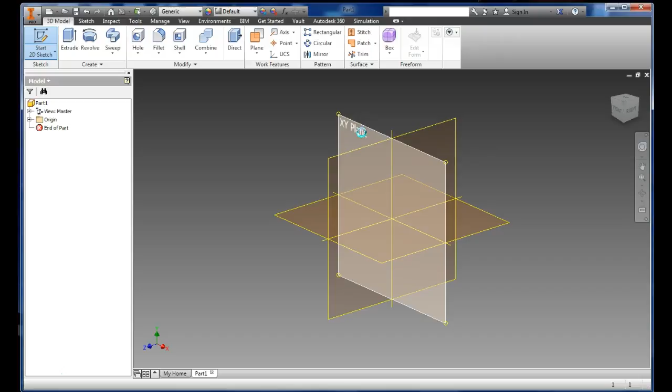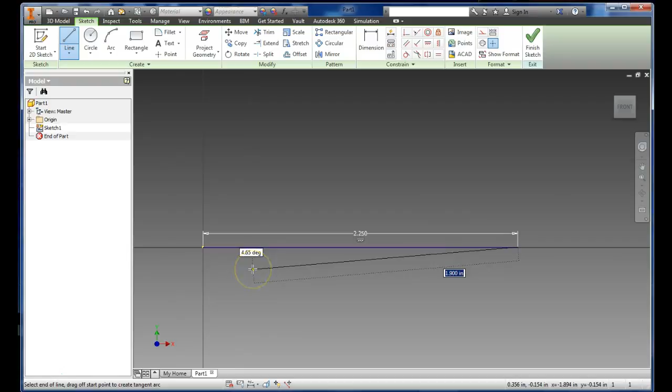I'm going to select this plane, XY, and now I'm starting to sketch it out. Again, I'm only going to draw the top half to make it a little easier. 2.25 is the overall length. Zoom out. Alright, on this right side, the diameter is 0.625, so I'm going to go up half of that - 0.625 divided by 2. That automatically did the math for me.

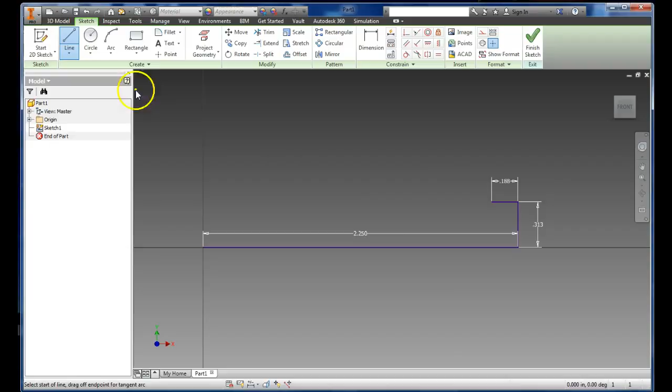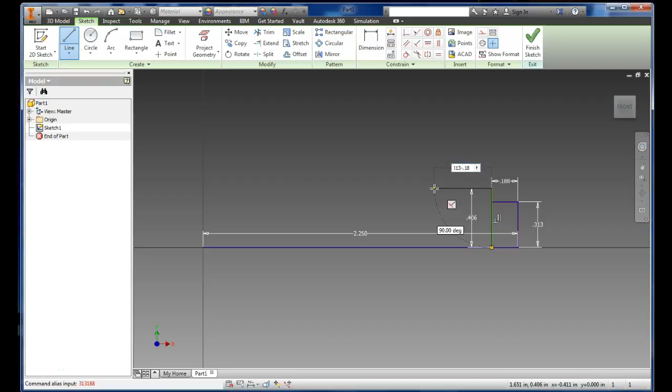This section comes over 0.188. Now I'm going to come up. This next diameter is 0.812, so 0.812 divided by 2. And this one comes over - total distance is 0.313, but I've already gone 0.188. So let me see - 0.313 minus 0.188. There we go.

Then line it up. Next diameter is 1.625, which is the biggest one - 1.625 divided by 2. Alright, this one, all the way from the back is 0.75, so I have to subtract 0.75 minus 0.313. Down. Next diameter is 0.75, so 3/8 up. This distance is 1.688 minus 0.75. Connect down. And then the very last part, diameter is 0.312, so 0.312 divided by 2, and over.

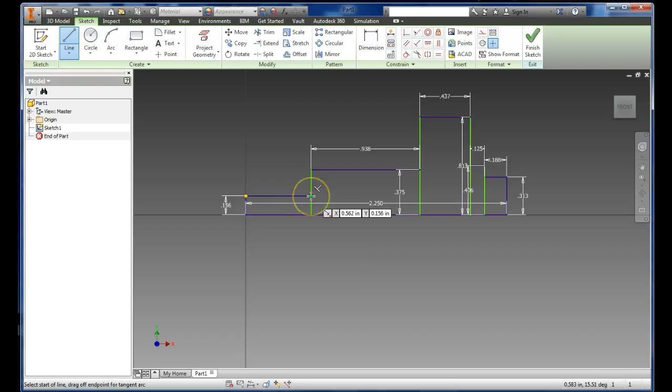Trim. Oh, out of the trim command. Alright, now see how these are jumping up?

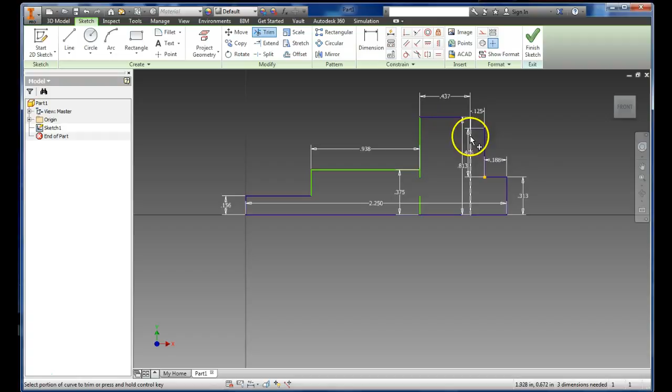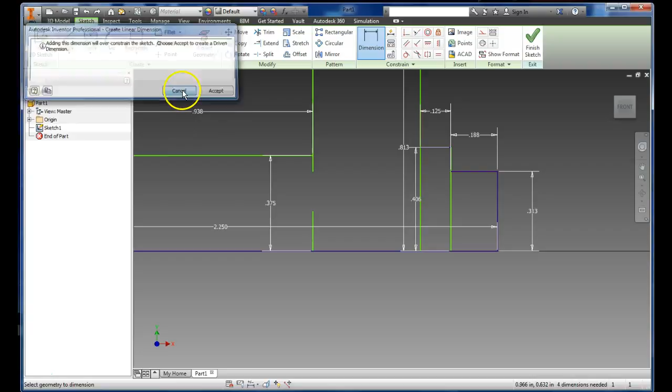You have to add in a dimension to kind of lock it in place. So if I go endpoint to this line, bring it over. Alright, so it's saying over-constrained, delete, point, line, place. There we go.

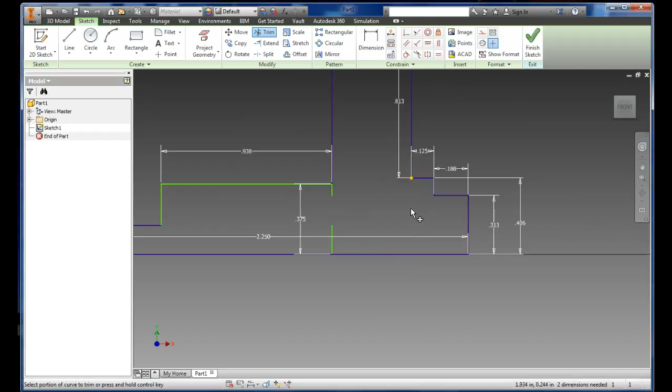Now if I trim it, it should stay locked in place. So if you click trim, it's going to try and keep this dimension the same, and it's going to move the whole thing up. Let's see if it does the same for this one. Trim. Yep, see, kept it the same, moved it up. Let me go back.

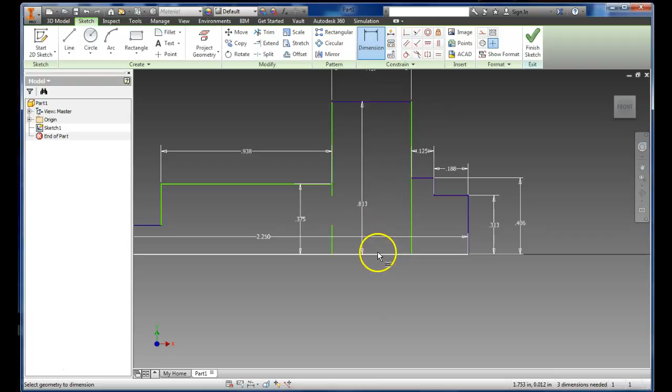Let me do a dimension here to here. Over constrained, so I got rid of this one. There we go. Now, because it's not measuring the distance of this line, but the distance from this one to the center line, when I trim it, it'll stay. These little bits I can just delete.

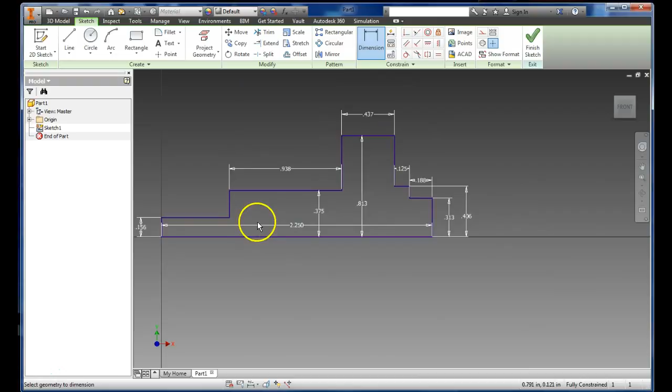Now that we're getting into stuff that's a little more complicated, putting in dimensions and having them go into the right spot gets a lot more important. But I have the silhouette of one side - I finished my sketch.

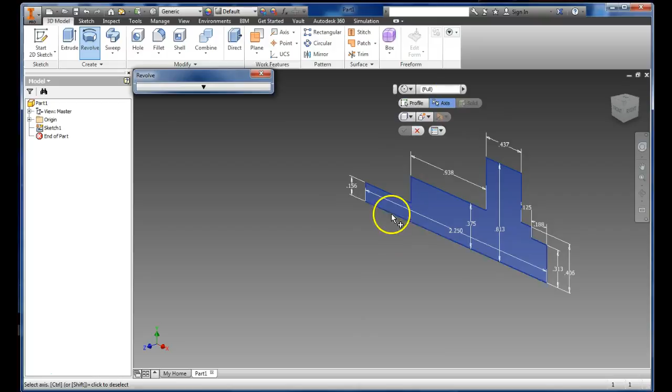Revolve. There's only one profile, so it automatically selects it. Now once I set the axis, I get my center point here, and I rotate it around.

Last thing is there's a hole in here. It gives me all the details, so I'm going to use the hole command. Alright, it is a chamfered hole, so I'm going to select here. The angle tells me it's a 45 - I think I'm going to have to double that to 90, but let me double check.

This distance it tells me is 0.062, which seems a little goofy. Oh, because that's giving me an actual chamfer. Alright, so we'll just do a regular hole and we'll chamfer it separately.

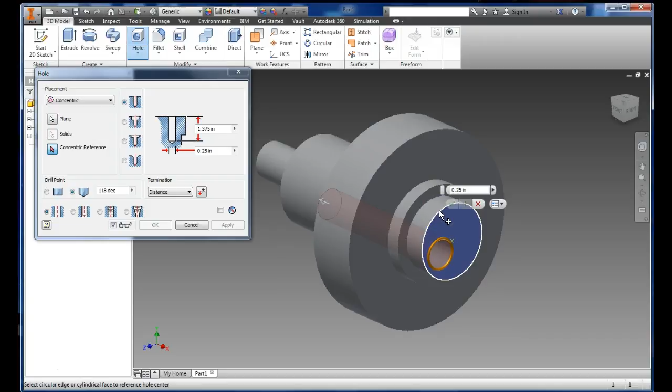The depth, it tells me, goes down 1.375. Diameter is 0.25, so that's good. Looks good, got that, got that. Change from linear to concentric. Select my plane, select a concentric reference, one of the other two circles. Select it, click OK - so I have my hole through the middle there.

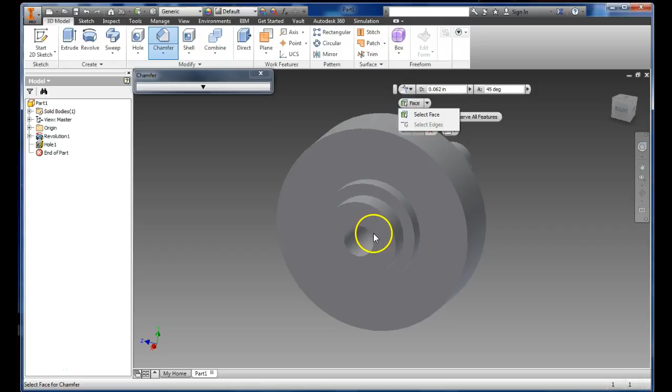And all I would do is fillet, chamfer, distance, like 0.062 - get rid of that extra period in there. Distance and angle, and it's on a 45. Go here, select my edge, click OK, and it makes it. So they list it a little bit differently - if I was a machinist or someone doing this, I would just do a countersunk hole, but they did a chamfer onto the end of the hole.

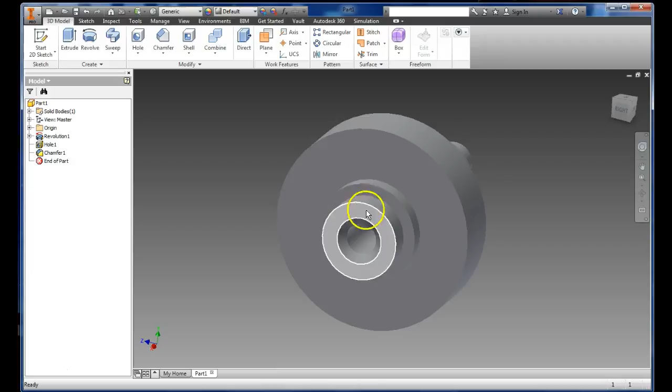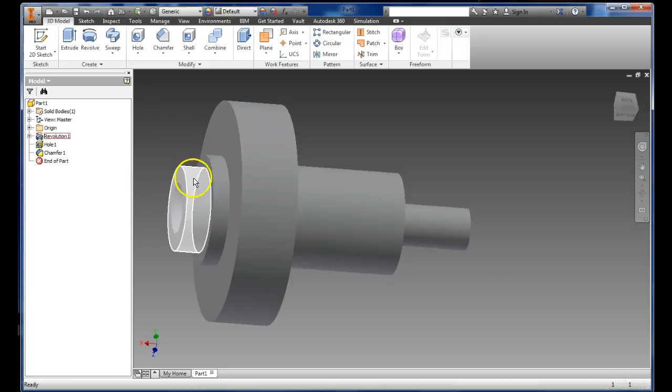Alright, the other way of doing this, if you didn't do a revolve, is basically start with this circle, extrude at this distance, draw this circle, extrude at this distance, and basically you're building steps on. So instead of one revolve command, you would have 1, 2, 3, 4, 5 extrusions. Again, this one not a huge deal, but on other ones, if we can simplify this model tree, that's going to be better and easier. Once you get an error, it will make it easier to find where the error or where something got messed up actually is.

So I have this one - let me go save as. It is valve pin. Save.

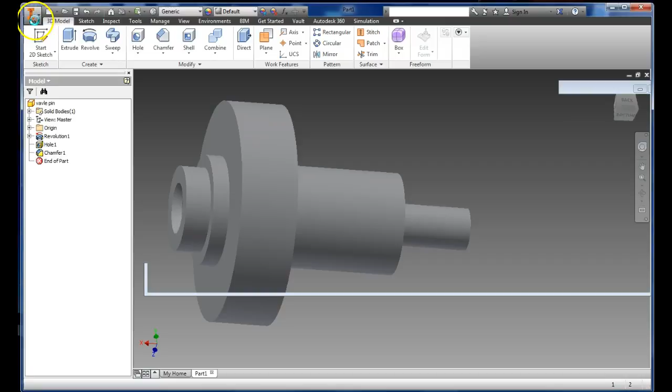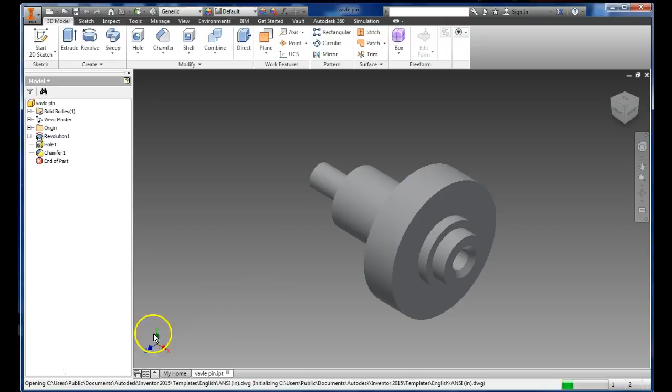Now if I go new, an English drawing in inches. It's really slow today. Alright, here we go. Edit sheet size - to A so we can actually print it.

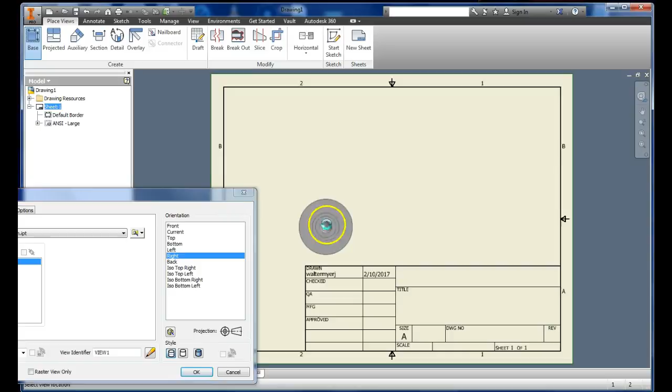Base - that will work. Actually, let me do it this way. Go here, pull one up, an ISO view, create, and then I'm going to do a section for the right side.

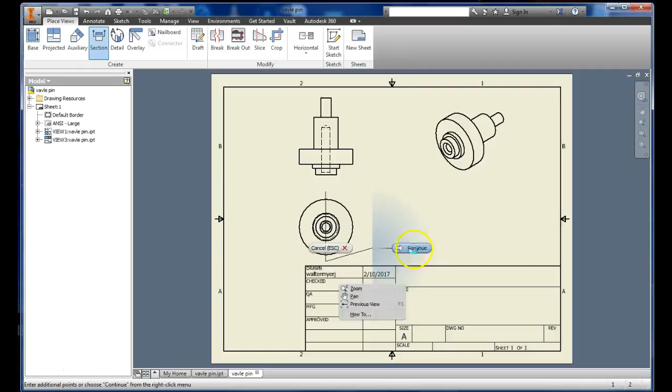So do section, select my view, draw a line through the center of everything, right click continue, pull it to the side. Again, it has different options - you don't want hidden lines removed, shaded. Don't worry about shading it because we don't want all that gray. So we want this one here, full section depth. Click to place it.

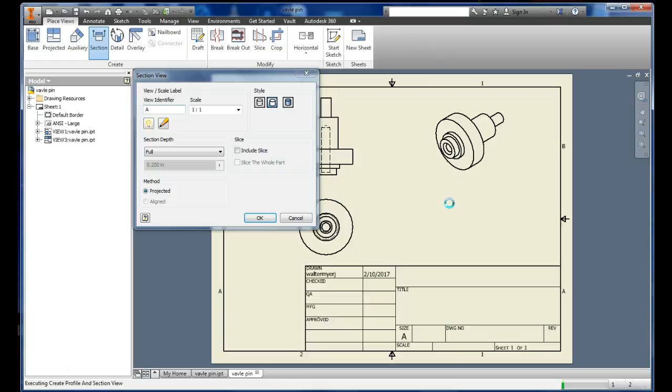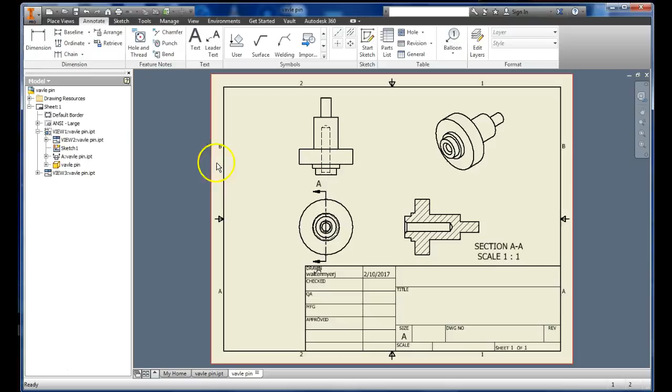Move the label over there. There you go - so that's all you need. You can make sure you have hidden lines turned on. And then you just add in your dimensions to everything, and the valve pin is all complete.